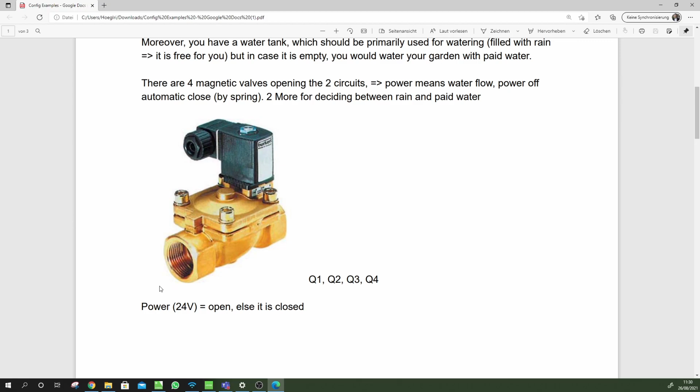And for this, I use magnetic valves. They are available in 24 volt DC, and there's basically two different versions: normally open and normally closed ones. Depending on the NO or NC, it is letting water through or not without power. In our case, we assume that when we power them with 24 volt, then it's open and water goes through, and else it is closed. Okay, so this is here.

Then we have two sensors to really measure the humidity of the ground, if the grass or the earth is wet or not. They deliver a 0 to 10 volt signal, which we will transform into a 0 to 100% humidity value. And we would like to say if the ground here is below 20% humidity, we would like to start watering until we reach 40%. The reason for that I will explain you later.

And that's this part. Then we have here a rainwater tank with a sensor to see how much water is in there, and a pump. And of course, if you want to use the rainwater, the pump needs to run. Then you have two more valves to switch between: is it paid water or is it rainwater?

In addition, we would like to say if it rains tomorrow, so we use a weather forecast, then for a certain amount, let's say 5 liters per square meter, or whatever makes sense for your specific project, then we will not water today.

On top of this, we have to say, during the day when the sun is shining, we are not allowed to water it because the bubbles of the water, the raindrops, it will burn the grass otherwise because it's like a lens, the water drop. Okay, so with all these conditions, we will now program live.

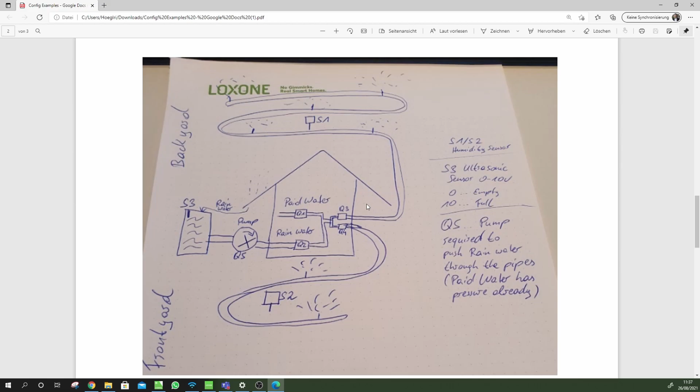Now, how should we start with this maybe complex scenario? I always break it down by the relays, so I always start with just adding the relays onto the page. And maybe let's start with the rain and paid water. When should happen what, or when would we like to use which of them?

And we said with the rainwater tank, if it is containing water, then we would like to use the rain, and otherwise we would like to use the paid water. Okay, so how could we do this? I would say, if there is at least 5% rainwater inside, then we use it, else we use the paid water. Just to be on the safe side, 5% full.

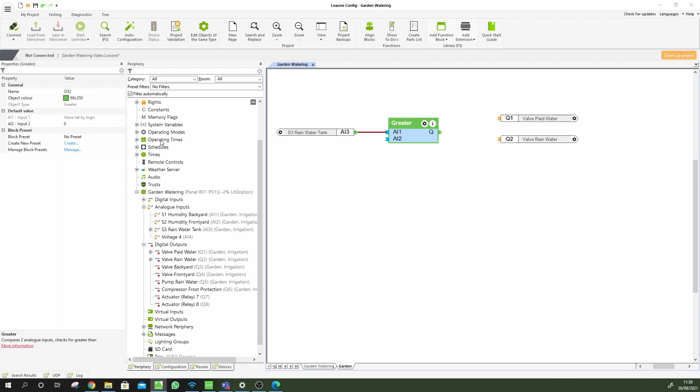Now we could use as simple as a comparison where we say if it is greater, so if the 0 to 100% value is greater than 5%, then we use the rainwater, and that's it for the rainwater.

How do we now do the same for the paid water? We could say if the rainwater tank is less than 5%, then we use the paid water. Or, maybe a little bit more elegant, I could also say if it's not the rainwater that we use, then it's automatically the paid water. So this is also an option. So I say here, if it's not greater than 5%, then it's the paid water. And what about the pump now?

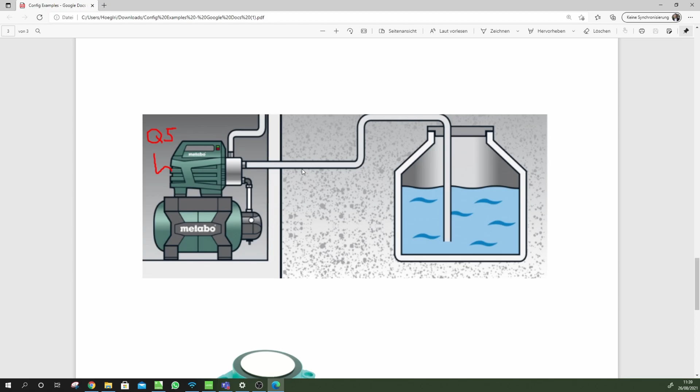The pump for the rainwater here. Because if we want to use rainwater, there is no pressure inside, so we need to have a pump which delivers us the pressure if required. So we can simply put the pump for the rainwater also on the same greater here.

And then we can simulate as well, once it is greater than 5, so you see now it's 0, then it's off and the paid water is used. And once it's greater than 5, let's say 10, then you see both the pump and the valve for the rainwater will both be active.

There is maybe a little expert programming you can do. If you think about it, the valve here needs, let's say, 5 seconds to fully open. So I would make a little delay between the pump and the rainwater so that the pump does not already pump really hard against the closed valve, while it takes a few seconds to open. This is also very easy to realize.

We simply disconnect the pump here. We say with F5, you can search, by the way. We put a monoflop inside, which transforms - sorry, not a monoflop - we put a switch on delay in between.

And this, as the name suggests, has a little delay between switching on that you can define here in its properties. So we say 5 seconds, and then also the pump turns on, to give enough time for the valve, the rainwater valve, to open.

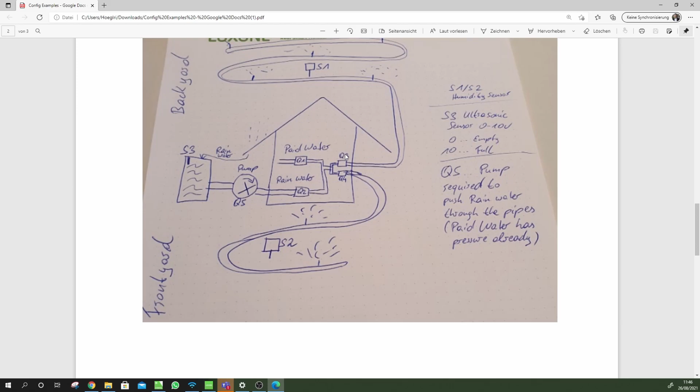The next point was that we do not want this all happening if rain comes within the next 24 hours. There are different options here. You can use the weather service, you can use the precipitation value here, where you can set the current one, or with an offset, or at a certain time. But since the recent version, there is also a system variable, which is pretty cool, where you can say the expected precipitation for the next hours you define here, up to 66.

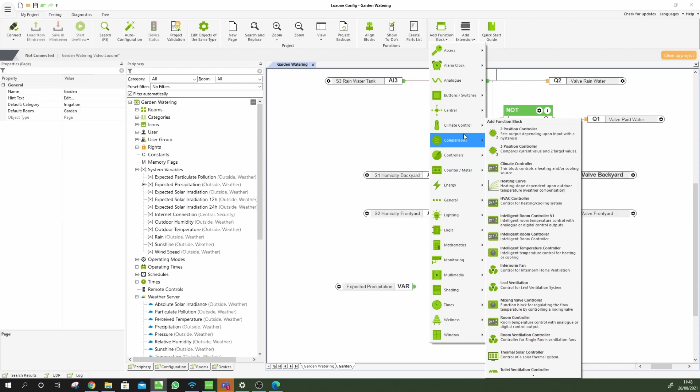So let's say we keep the 24. You could also say within the next 12 hours or whatever, but here we say the next 24, and the unit here is liters per square meter. So I put this on the page here. And now we say, okay, when do we want to water? If it's less than 4 liters per square meter within the next 24 hours. Again, completely dependent on what your plans are and your project is about.

So these values can be individual. If the expected rain is more than 4 liters per square meter, then we would like to block the watering here. How can I do this? In my case, I like to make a memory flag here, and the memory flag you can place on the page. Here I say it's called watering allowed, for me it's a clear name. And I connect it here.

Now this memory flag can be used wherever and however often I want on any page. So if you have another page where you would like to transfer this value, I also like to use memory flags for this. Okay, oops, delete this one. Delete page. There we go. So I have my watering allowed here.

And first of all, let's block here the rain and paid water, because again, if there is rain forecasted, then I do not want to switch between the valves because I don't want watering at all. So how can I do this? Maybe an easy way could be to say here, if the water tank is full, and watering is allowed, then I want my stuff to happen.

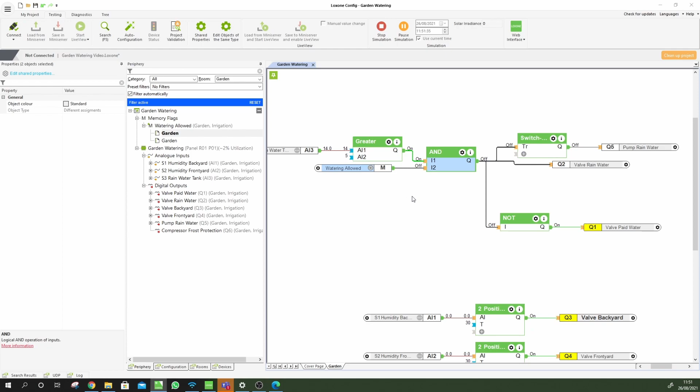Also, you can copy and paste. If you select multiple function blocks, you can copy and paste the whole logic.

So I have to make it like this, and not like this. Now let's test it again.

F7 starts it. Watering is not allowed because we have more than X liters per square meter again, and now it's blocking the paid water valve as well. We can test it, and we can also check: the rainwater tank has some water, but still the pump for the rainwater and the valve do not turn on.

But if I now have no expected precipitation, let's say 1 liter only, then I see it's again allowed here to have the rainwater, and once the tank goes empty, let's say we have only 1%, then we switch back to the paid water.

So already a little bit more complex logic, but you see, I often use the simulation to just double check, even if it's a simple logic, because this could likely be forgotten, that this NOT will still block my stuff.

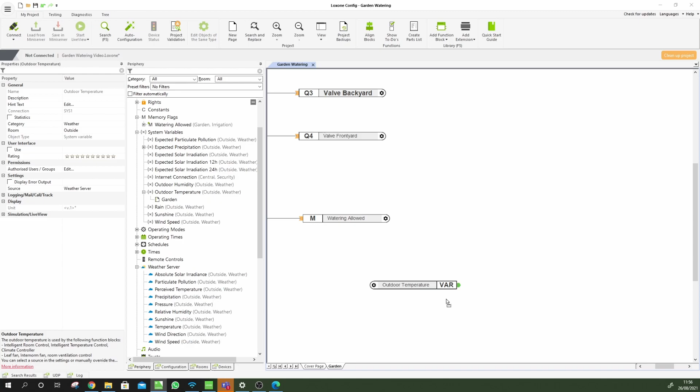In our case, we use, as we have it anyhow, the weather server. We put it on the page. I always scroll out a little to position it where I want, and then I can zoom in while holding control and using the mouse wheel up and down.

Then let's say, when should we stop watering? When the temperature is below a certain value. So we could say less than something, 5 degrees for example. Again, we could have the same topic if the temperature is 4.5, 5, 4.9, 5.1 - it could be locking and starting and stopping the watering again all the time.

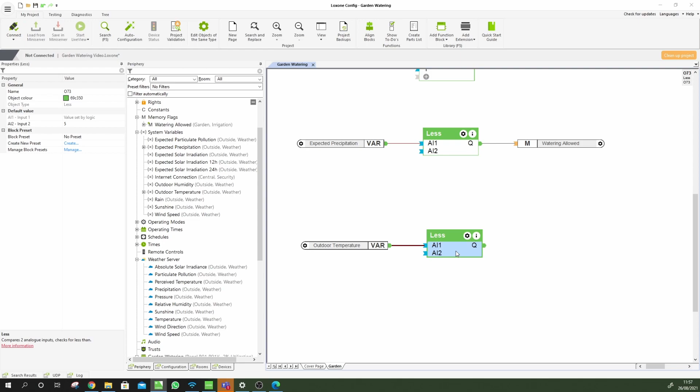So there is another function block I'd like to show you, which is the threshold switch. You see it here - what this has is an on value and an off value. It's a little similar to the two-position controller, and I will show you here.

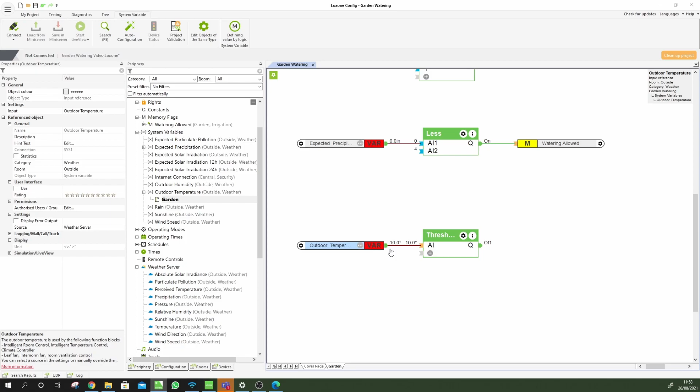Let's say we want to have the frost protection active below 5 degrees, and then it goes up again till 10 degrees until we turn it off again. If we simulate it with F7, then at 0 degrees it's on, and it needs to heat up outside - at 5 degrees it's still on, the frost protection, 7 degrees still on, 10 degrees it's off, and then until we drop to 7 degrees still off, to 5 degrees again, then it's on again, the frost protection.

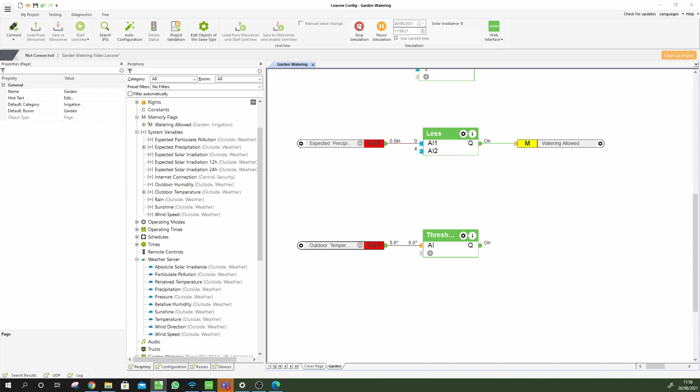So for the frost protection we could now use another memory flag, or we can also use an operating mode called frost protection - depends on the project. Maybe you use frost protection for something different, then you could make an operating mode out of it. But in our case, we use a memory flag, which we call frost protection.

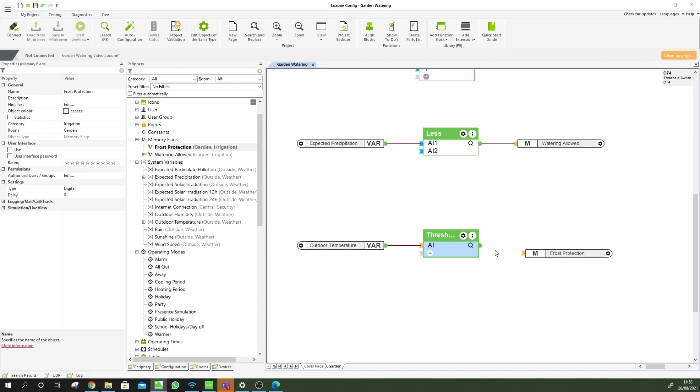Okay, and we connect it. When the frost protection is active, watering should not be allowed. So how can we easily do this?

We can now put the frost protection on the page, and we could say here again, with this and stuff, we could lock it here in addition, and not frost protection, and not frost protection.

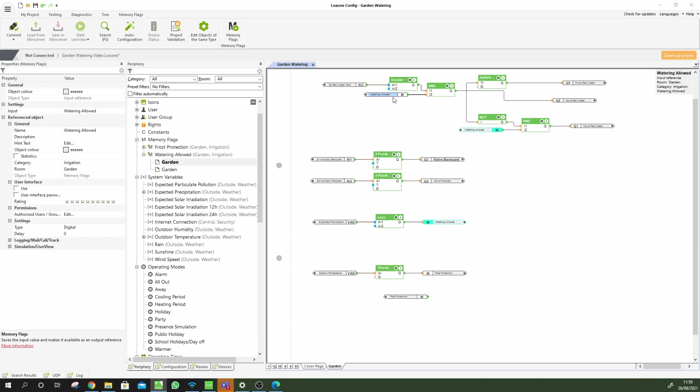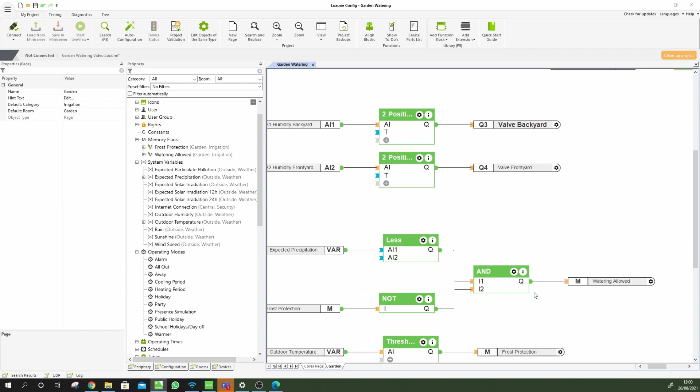Or we could say, as we use the watering allowed anyhow already, we could put the frost protection into relationship here already. So if the precipitation is less than 4 liters, watering is allowed, but we also say and, so it is allowed, precipitation, and there is not the frost protection active. And then we can already use the logic for the valves that we have already programmed, because it's up here already, and watering allowed. The watering allowed now has this additional condition from the frost protection.

Pretty cool. Okay, we already managed to do a lot. But the next thing is that we want to limit the automatic watering for the times without sunshine, so in the early morning or after sundown. And there are a few ways we can do this.

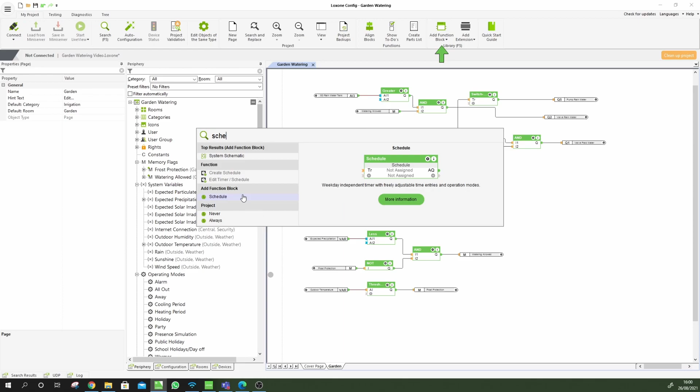First of all, the easiest one would be to use a schedule function block. Here we call it watering allowed or watering times. And then we can, with a double click on the rubber here, delete everything. And then we can say in the morning from 6 to, I don't know, 8 every day.

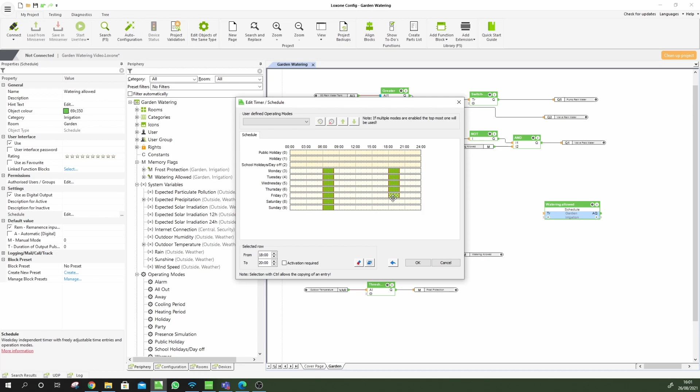Like this. With control, you can copy the entry. And also, let's say after 6 till 8, another 2 hours, it's allowed to water as well. You can then, of course, as the end user, change these times in the app.

And then here, how can we now use this to lock the watering or only allow it in these times? The output, AQ, is active once the times are active. How can I simulate this? Should I now wait until 6, or should I make a fake entry just to test?

No, there is a cool feature in the simulation that you can use the current times. You see actually it's 4 p.m. now. Or you can say I want to use a dedicated time, and now we say it's 6, almost 7. Okay, and then you see here the output AQ is on. If I use the current time, you see the output is off due to my schedules that I made here.

Okay, and now I could again just use this one and put it in front of my watering allowed memory flag. So I could make another AND afterwards here. So like this: rain forecast is less than 4 liters, and there is no frost protection, and watering from the schedule is allowed. So I could make it like this.

Or what you might not know is that the inputs of the AND can be used multiple times, and these inputs are AND connected. So it is exactly the same as if I would do this here. For an OR block, like this, the inputs are OR connected.

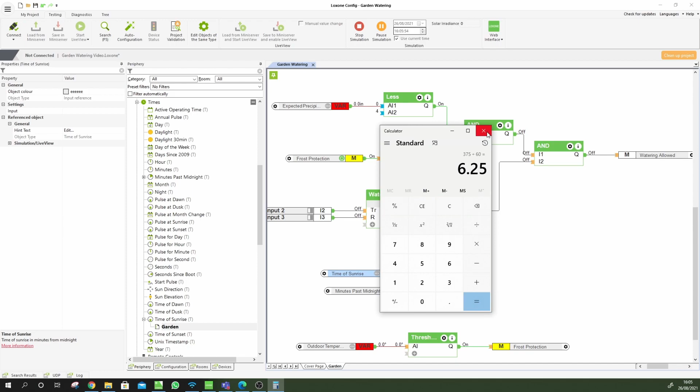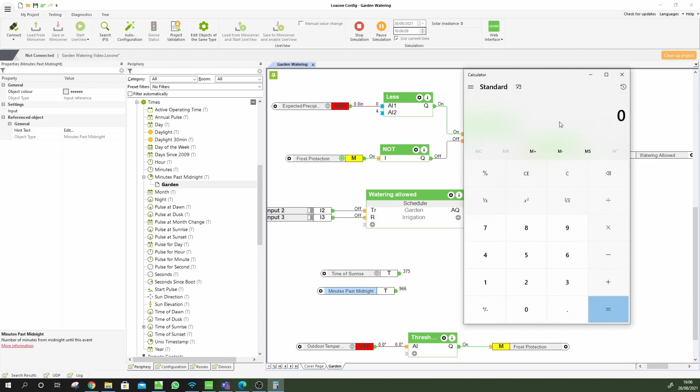Today in end of August, this is changing during the year. And now this is my time past midnight. If I again divide this, 966 by 60, you see it's 4 p.m., and 0.1 means 6 minutes, right? So 0.1, 10% of 1 hour, is 6 minutes. So we work with these minutes here.

And how can we now say, let's say we want to water 2 hours before the sunrise. So 2 hours means 120 minutes. So we say, now it's getting serious, subtract. We subtract from the minutes past midnight - no, the other way around, from the time of the sunrise. So we want to be 2 hours ahead of the sunrise.

Again, simulation, F7. So you see 375 minutes minus 120, so we're at 255. And now we say, if this value here - wait, let me think - if this here now is equal to this, we could start a 2-hour pulse, monoflop. This we can do, I had to think myself with all the minutes and subtraction. So if my current time is equal to the 2 hours before the sunrise, that's what we did here, then I make a monoflop.

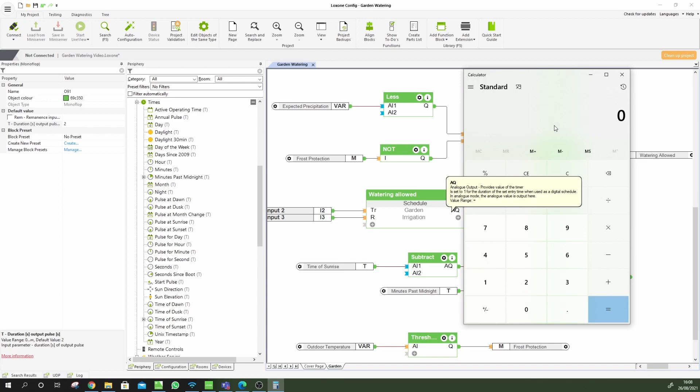And the monoflop gives me a pulse of 120 minutes. But here it is in seconds, here in the brackets, you see it's in seconds. So again, what is 2 hours? 2 hours times 60 is 120 minutes, times 60 is 7,200 seconds. And for this time, the watering now should be allowed.

This is the morning. Now we could do the exact same thing for the sunset. And if the sunset comes, we can do 2 hours after sunset. So we copy the monoflop with the 7,200 seconds like this, and we can say 'or' - so either in the morning for the 2 hours or in the evening after sunset for the 2 hours. Here we say it is allowed, so we can then connect it to this AND here.

And of course, either you use this variable logic or you use this schedule here. In our case, let's go for the variable logic. So now we say only before sunset... after sunset and before sunrise, 2 hours before each, and after sunset in the evening.

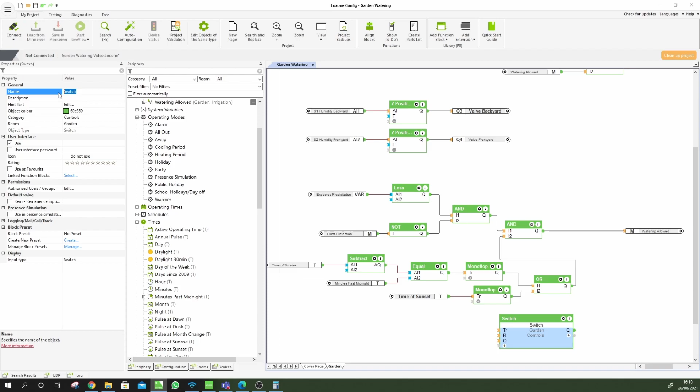What else can we do? What if you want to have the option as a customer to disable the garden watering? Let's say you have a party in the evening in the garden and you do not want the watering to happen. Then I would make a switch which I call party mode, or you can call it watering blocked if you'd like to be more precise. But let's say party mode, because this can do more things then, like turn on the light outside and whatever.

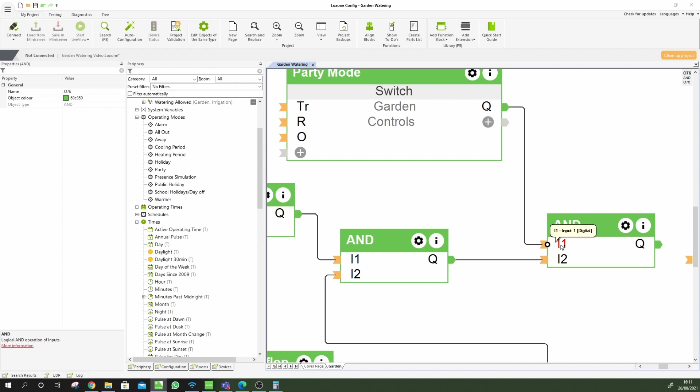And if the party mode is active, then I do not want this to be allowed, watering allowed. So again, I can make another connection here as well - all of this, and not the party mode. I could add a not button in between here, like we did here. But there is one other way to negate, invert the input: when you move your mouse over an input, you see this little dot, and if you click on it, it becomes red with this circle here. Now it's exactly the same as if I put a not function block in here.

Now I can switch the party mode on, and now all the watering is no longer allowed, because here, and not the party mode. And this can be shown in the app. I can actually just show you real quick. I need to reconnect to my demo case, and first I need to connect to the Wi-Fi. Okay, Wi-Fi connection there, refresh. Just a sec, here it is.

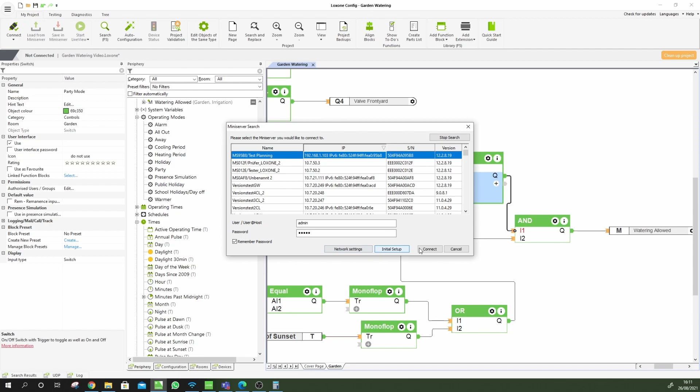Okay, and if I save this now into my file, the Miniserver is restarting. And if I open my visualization now, here, web interface, local address, I see...

That in my room garden outside there is the party mode, and if I activate it, then I see in the live view here, this is on. So whatever happens here before, it can never be on here as long as the party mode is active.

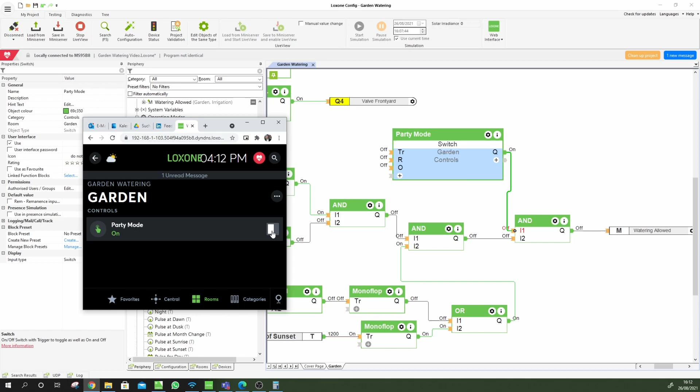Okay, so the live view is also another tool which you can use. Either you press something real, you check something, or you check if you, like here in the app, you do it. So this is live, not a simulation, but the live view. And the name tells you what's going on live on the system. So this is also something cool.

I could stop here now, but let's add just for fun a little more things. Let's say here we would like to have an automatic emptying of the pipes. We want to automatically empty the water in the pipes when the frost mode comes on.

So let's say, I mean, if this makes sense or not, let's say we put a compressor in here before the Q3 and Q4, and the compressor, if we turn it on, it blows in air and the water comes out. So even if it freezes, it cannot damage the pipe. Okay, let's not say this is reasonable, but let's say this is possible.

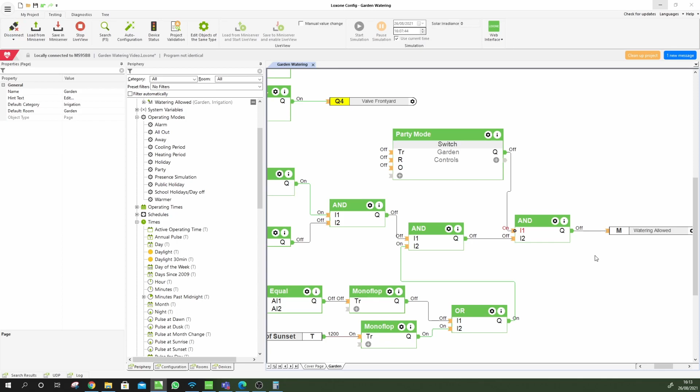So we have another actuator, the compressor frost protection. And if we turn this guy on, so actually it's here, the compressor. So if we turn it on here to blow out the water here and here, then we need to open the two valves, of course.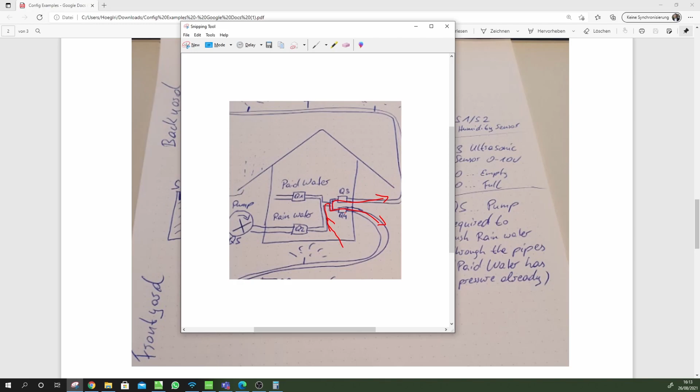So when do we need the compressor to turn on? When the frost protection comes on. Okay, then we stop the watering and we want to blow out the air. So again here, frost protection is on, and also we turn on the compressor.

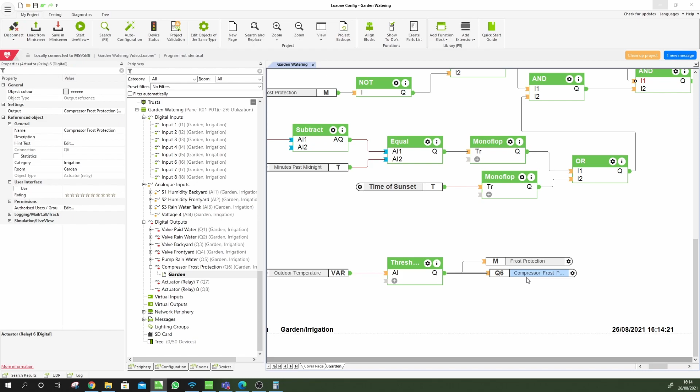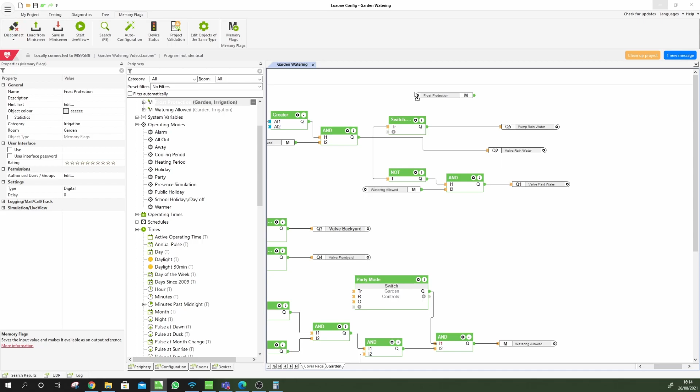Now we need to open also the valves, right? So we could say now, if the frost protection is on, which is a memory flag, it's the same value always as the compressor, then by whatever else logic happens before the valves, it doesn't matter if we directly here connect the frost protection memory flag onto the valves.

So even if the garden watering, party mode, whatever is on, which blocks the watering normally, if we put the memory flag right before the relay, it doesn't make a difference. Whatever is before here doesn't make a difference. If this is on, it's on here, it's open.

But that's fine, because during frost protection, the other two valves, paid water and rainwater, are both closed. So it will not drain any water. Okay? And this would be another example.

And to finish it off, let's just make a nice last visualization of the state from the watering. What do I mean? I want to know if the valves are open or not. And how can I do this? There is a virtual...

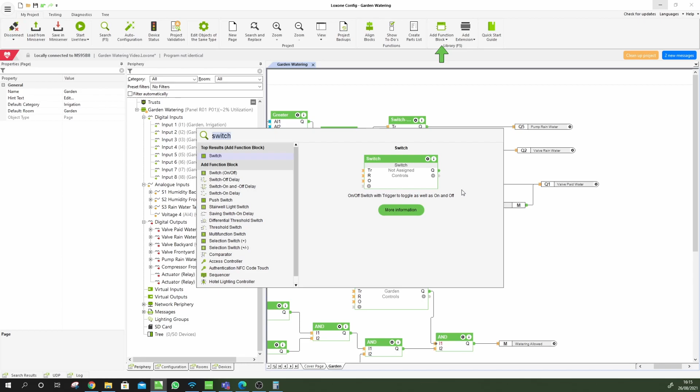Status, and this virtual status can be labeled or can be named valve backyard. And now I can say here in its properties, it's by default analog. So I can display with this here an analog value. I can validate it, I can say degree, or let's maybe do the same for the rainwater tank.

So we can use it analog for 0 to 100%. But for the valve status, we want to use it digital, on or off. That's what the valve can be.

So, sorry, we are here in the, this was the paid water and rainwater, but here are our two valves for backyard and front yard. So I connect this like this.

Now I can say here, I give it a category, irrigation, for example. The room is garden by default when I add it to the room. And here I can give it as well a nice little icon, so maybe this valve actuator icon here.

And then I can copy and paste it. Oops, copy and paste, just rename it front yard. All right, like this, and save it to the Miniserver.

Yes, there are changes on the Miniserver which I would like to take out, which is fine. By the way, for this virtual status, you can see here the status text: 0 means off, 1 means on. You can also change it to 0 means open, 1 is closed, or the other way around.

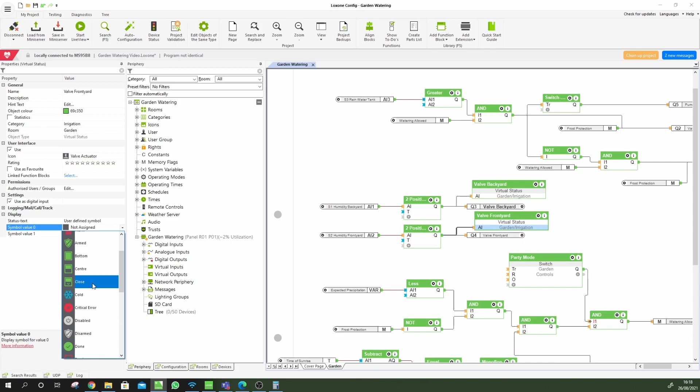You can also make user-defined symbols, where the symbol value could mean something, maybe open or closed. You could say on or off, then you don't see the text. Let's save again like this, then you'll see the difference.

Rebooting. By the way, if you get this message, external access denied or blocked, that's because when the Miniserver reboots and you're locally connected - I'm in the Wi-Fi of the demo case now - it tries to locally access it, and if it cannot, it tries to externally do so. But of course it's still rebooting, that's why this message comes up.

So now you see here the one I did not change - it's open. And the other one here, with the icon, means closed, and the other means opened. So this way you can display it, but I did it the wrong way. Value 0 means off and 1 means on, so I did it the opposite way.

So I have to turn it around. 0 means closed, say disabled, and 1 means on. Or I keep it as the other one: 0 means closed, 1 means open.

I can also change the color, by the way. If I change it here to user-defined, I can say the open value should be blue, because then water is going, and red means closed. Also an option. So you are pretty free to define a lot of stuff here.

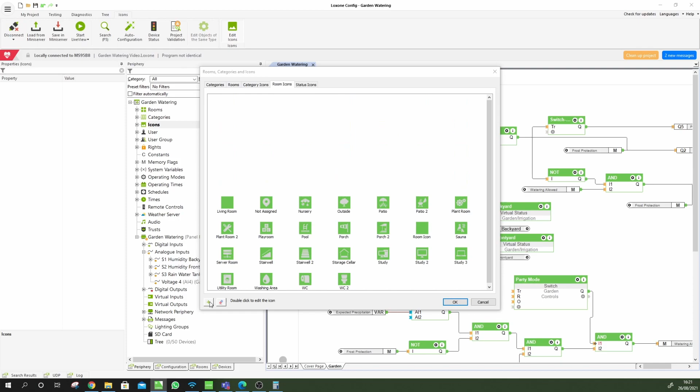Here, edit icons, my category icons or room icons or whatever. You can make a new one here, and say this is my nice rainwater tank. Of course this is just a joke now, but you can also import PNG files with this size here. And then you can use your own icons if you need to.

But for this time, I just go for the icon. I don't know, doesn't matter, it does a little. Here, there's a water drop. Let's take this one. Okay, and now we save.

And then you'll see after rebooting again, external access blocked, because it tries to access it remotely, but once it's back up, you see I'm connected. Here, garden rainwater tank is filled by 0, but I have on my demo case the potentiometer, which I can turn - it's the third one. So now you see my rainwater tank is filled 60%.

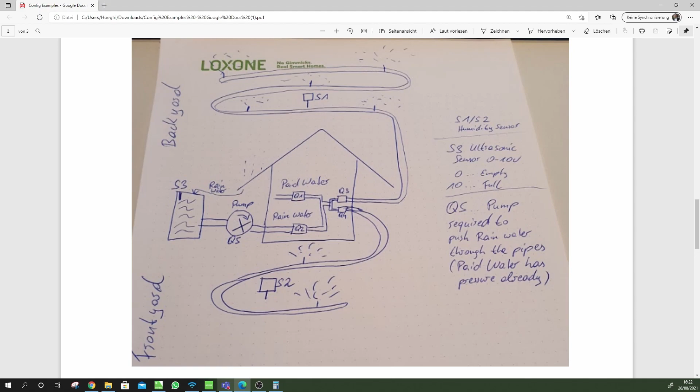I can also turn up the first sensor, and then you'll see the valve in the backyard is closed. So what I just did is use the potentiometer in the demo case to control the first sensor here, which is the humidity of the backyard. And now I can live demonstrate it.

Actually, the blue color looks a little stupid, I have to say. I would go back to green then. You see? Okay.

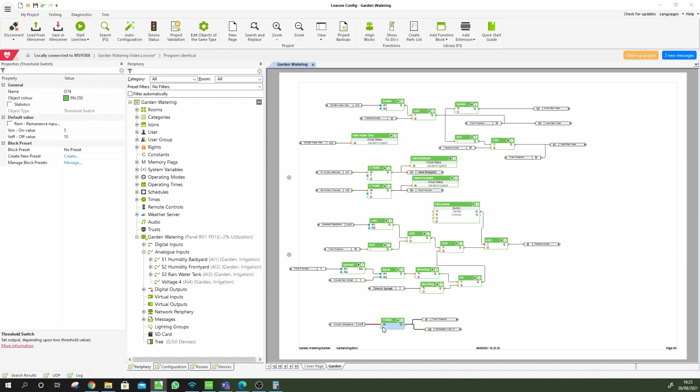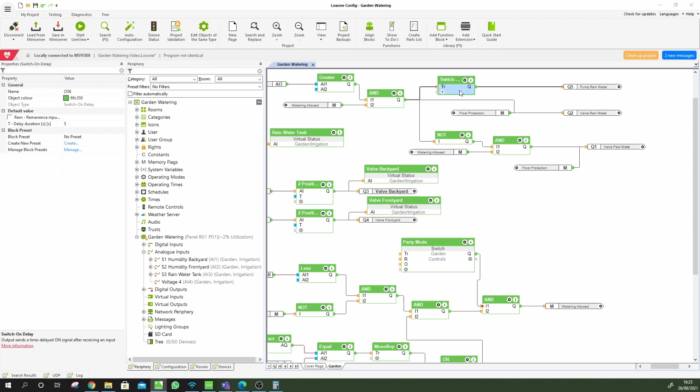So, I hope this could give you a cool overview about what's possible with Loxone. There's a ton of different ways to reach the goal of what we just achieved. That's the cool part - everybody has their own ways to come to the end. Hopefully you got some new tricks from this video. Let me know if this is an interesting video format, if you would like to see more of these videos in the future.